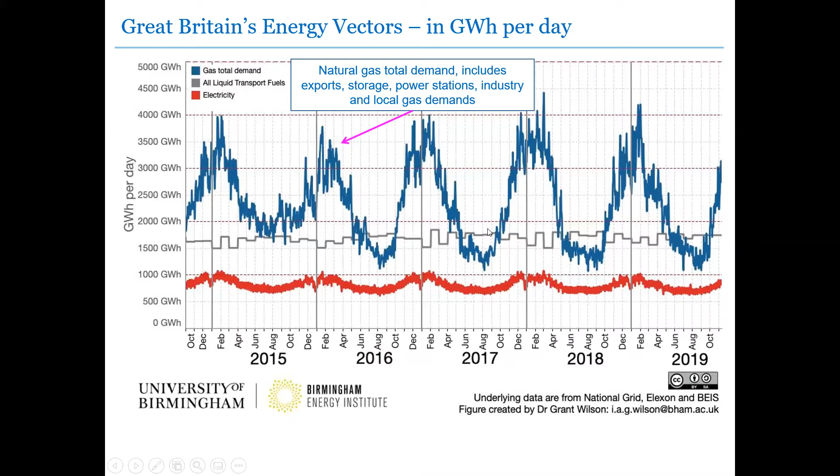So air quality is a driver in many cities in the world, and it's another factor we need to think about in terms of the motivation for looking at some of these cleaner, non-combustion based technologies, because a lot of the NOx emissions come from the combustion process.

I am going to talk a fair amount about hydrogen. And when we talk about electrochemical technologies, we're going to talk about making hydrogen, and we're going to talk about fuel cells for converting hydrogen. And the concept of hydrogen and its role in the energy transition is actually extremely topical at the moment.

Hydrogen has had previous waves of enthusiasm back to the 60s when people first sort of turned to the concept of hydrogen, through to the 90s and 2000s when there was a lot of surge of interest in hydrogen cars in particular. But I think today we have formed a nuanced and balanced view of hydrogen, which is that we look at decarbonising the whole of the economy.

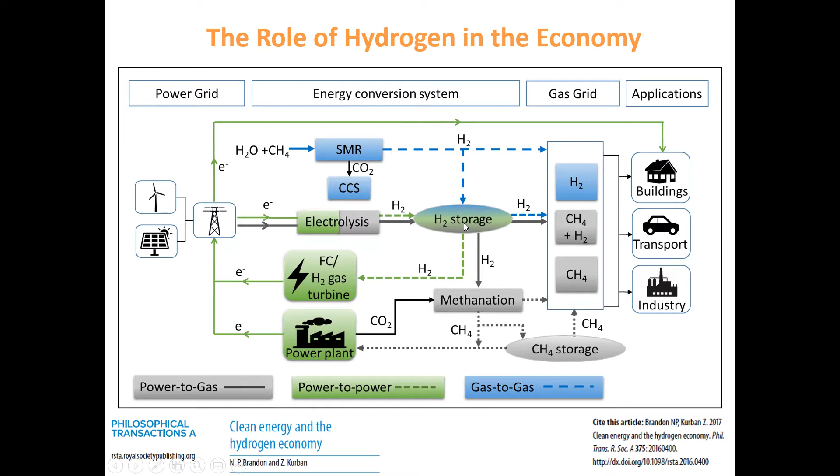So it's the interplay of electrons and molecules that is, I think, the key to achieving the lowest overall cost of decarbonisation going forward. And there's a big debate about the relative balance of those things, but I think it's very clear to me that you need both if we're going to cost effectively decarbonise.

So let me start by talking about hydrogen from electrolysis, and electrolysers are, of course, an electrochemical technology, the subject of today's discussion.

And when we look at green hydrogen from electrolysis, there are effectively three solutions that we have available to us, two of which are commercially mature today, and one of which is not yet commercially mature to the same scale, but is a subject, I think, of interest. And indeed, as it was mentioned in the introduction, this is some work we're going to be doing through the bp-ICAM program for the next 12 months, and I'll talk a little bit about that.

For anyone who follows this, you'll have seen a surge of interest and national commitments to green hydrogen from many countries around the world, including in Europe, but also in China and Australia, and even the UK coming forward with some statements very shortly around its ambitions around hydrogen. So when people talk about green hydrogen, they're really talking about taking electricity and directly splitting water to make hydrogen and oxygen. And it's the hydrogen that we particularly want.

We have today available electrolysers. These have been available for over 100 years. They're commercially mature. You can buy a 100 megawatt electrolyser and use that. It's a relatively low temperature technology, and it's the lowest cost route to green hydrogen today. We also need to remember that today green hydrogen is the most expensive form of hydrogen. So we'll look in a moment about where costs may be going. In terms of green hydrogen, alkaline is the cheapest available option today, reflecting the maturity of the technology.

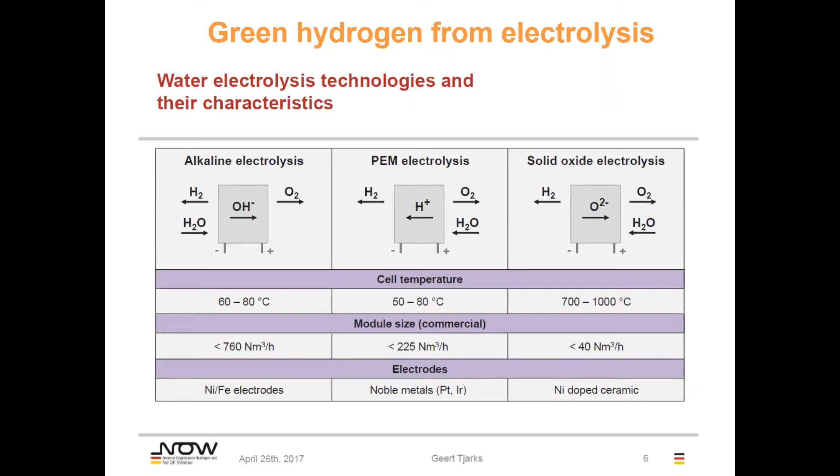So where are the costs today? For anyone interested in looking at this space, I commend this report from IRENA on green hydrogen cost reduction. It came out late last year. It's a good introductory overview of where these technologies sit today. This is their data. I've had nothing to do with the report, but it gives you some estimates of hydrogen production costs in US dollars per kilogram of hydrogen, being around $5 US today, but there's a range. And it makes some projections about where costs may get to, and they're projecting out to perhaps $1 per kilogram of hydrogen into the future if everything aligns.

If we look at the cost of green hydrogen today, 60 to 80% of the cost of that hydrogen is the cost of the electricity that's going into the electrolyzer. So future costs of green hydrogen are very sensitive to the renewable energy price. And this cost down curve here makes some estimates of the relative importance, for example, of reducing electrolyzer cost. This big drop down here is based off the decrease in renewable electricity price.

Something around electrolyzer efficiency, which of course is also very important because it impacts the amount of electricity you need, something around capacity factor, lifetime, and risk, which is related to the weighted average cost of capital. So if all of these things align, the authors of this report are projecting that we can see $1 per kilogram of hydrogen. Of course, whether we'll get there remains to be seen, but it shows the potential and is certainly getting a lot of people excited about the opportunity.

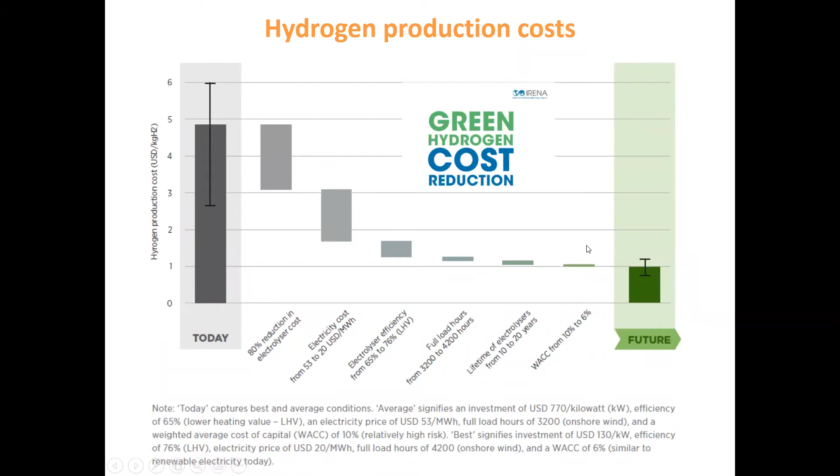As I say, my particular interest and the interest of some other colleagues is in high temperature electrolysis. And this is a couple of graphs to try and explain why we're interested in high temperature electrolysis. This is about energy consumption, kilowatt hours per cubic meter of hydrogen, for a liquid phase process like the low temperature electrolyzers, or a high temperature process like the solid oxide electrolyzers. This change in energy here reflects the heat of vaporization of water. So in this phase, we're dealing entirely with steam. We're not having to go from a liquid to gas transition, and that saves us some energy.

But you can also see that this is the Gibbs energy for splitting water. So this is the amount of energy we need to put into an electrochemical reactor as the theoretical minimum to split water. This is the enthalpy of that reaction. And while the enthalpy stays relatively independent of temperature, the Gibbs energy comes down. So that means we need to put less electrical work in to split water to make hydrogen as the temperature goes up. Of course, we still need to put the same amount of total energy in, and so we can balance that decreased electrical energy demand by putting in heat.

So it allows us to put in both heat and power to produce hydrogen. And so if we can co-locate our electrolyzer with sources of heat, for example, alongside other industrial processes, it provides us with much lower electrical energy demand. And of course, the electrical energy is normally the expensive bit of the overall process.

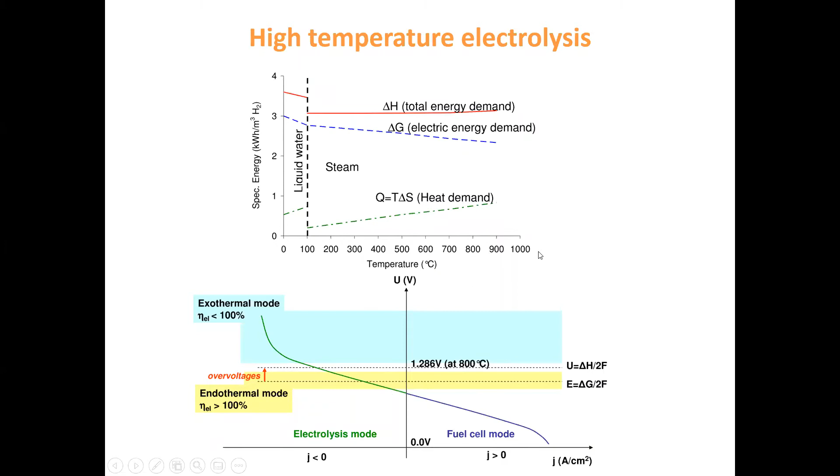So this is, just very briefly, the approach we've been taking within my own group, and we're very interested in the electrodes that are made and how you design electrodes that are both stable in the operating conditions and sufficiently active. And this is the sort of approach we're going to be taking forward in part in our new bp-ICAM project. We've been using electrospinning to make some quite interesting fiber-based structures, and then integrating those with our particular material here, which is a gadolinium cerium oxide.

This is a material that's catalytically active for the reactions we're interested in. So now we're talking about the reduction of steam. And then we produce these quite interesting microstructures which combine these electrospun materials with this doped cerium oxide. So this is the approach we're planning to take in the project, but we're going to not use nickel.

We're going to use some titanate materials that we've been exploring in a PhD project and take that forward. If anyone's interested in looking at this sort of work, we have a paper on this for solid oxide fuel cell electrodes. And this is the result of some of our solid oxide fuel cell developments. And this so-called fiber matrix structure, at least in this study, gave us much better performance than some of the other sorts of composite electrode structures we were considering.

And Dr. Huang, who did his PhD work, he will be the postdoc working on this project within bp-ICAM. So hopefully at some point he can report some of that work to you all. And this is the sort of microstructure we get. We're also very interested in the group in using these 3D imaging and visualization tools to try and understand microstructure and how microstructure relates to performance. And we'll be doing some of that work too in this project.

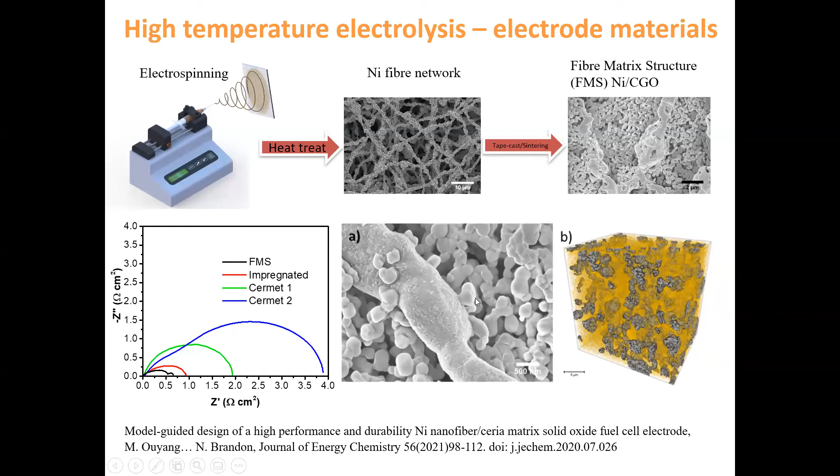We put in hydrogen, normally high purity hydrogen. That hydrogen is oxidized, releases electrons, forms protons. They're carried across this membrane, which has to be a proton-conducting membrane. It's a polymer-based perfluorinated sulfonic acid membrane. The protons combine with oxygen from air and the electrons to produce water, and the electrons are carried around an external circuit when it's connected across a load. That produces a flow of current, and we get a voltage generated based on the thermodynamics of the reaction. So typically about 1 volt or so when it's operating, a little bit less at higher power, of course, because of internal losses.

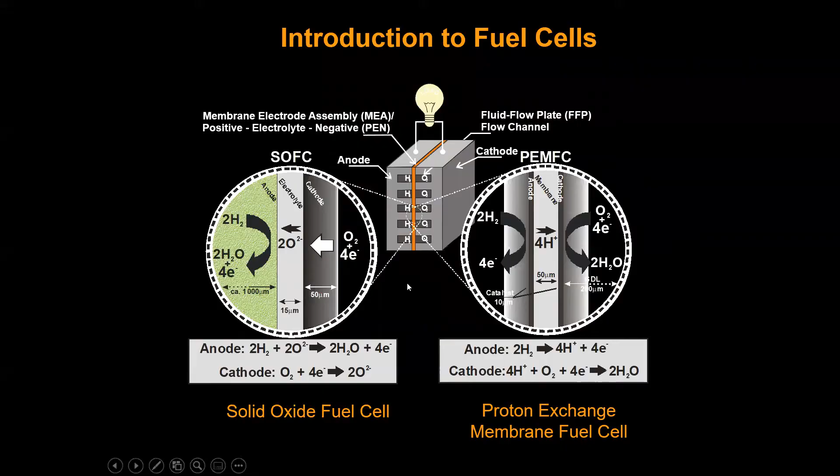But after that, you need to drive up to Sheffield, I think, to find the next one, though I believe Birmingham are putting in a hydrogen refueler at the moment. Or you can head west, and there's some in Wales, and there's some in Sheffield, and there's certainly some in Scotland as well. So this is where the landscape is for hydrogen fuel cell cars today.

The Toyota and Hyundai would be, I think, clearly leading in terms of having products on the market. The new Toyota Mirai is coming out this year, about £50,000, so less money with a longer range. But also the Hyundai Nexo is available, also quite an expensive car today.

Hydrogen refueling is appearing, and we might discuss in chat about the relative merits of battery electric versus fuel cell electric. But the rule of thumb, I say, is that as you need more fuel on the vehicle, as you want to drive it further, then the merits of a hydrogen fuel cell approach start to become more clear.

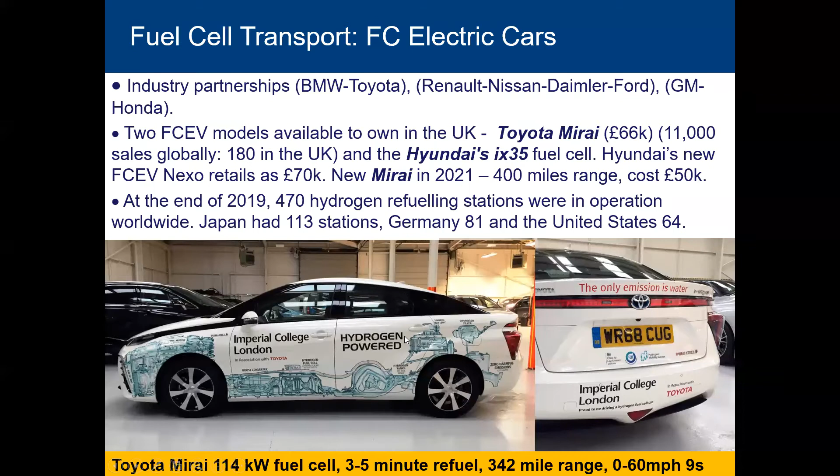One area where I think there is more clarity around hydrogen fuel cell electric vehicles is in the larger vehicle market. Fuel cell electric, I think, are a really interesting application area. There's increasing interest, particularly in Asia, in hydrogen fuel cell electric to replace diesel buses. The fuel cell subsystems are produced by a UK company called Arcola Energy. There's also Wrightbus in Northern Ireland working on hydrogen fuel cell electric buses.

If you're London-based, you can go for a ride on the RV1, which runs through Covent Garden, and they're refueled out at the Olympic Park to the east of London. And they've been carrying passengers for a number of years now on standard routes. But you can see a lot of interest in public good, high air quality, low emission hydrogen fuel cell buses around the world.

I'd say a newer, but I think really interesting area for hydrogen fuel cell electric is in the truck market. As we seek to go to complete net zero economies, things like long distance trucking or heavy duty vehicles really become hard to decarbonize using batteries alone. It doesn't mean it can't be done, but it's not such an obvious place to use a battery.

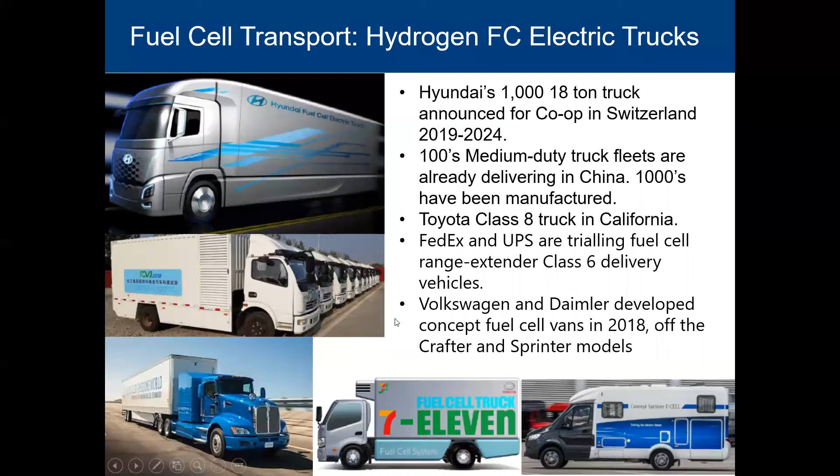Whereas it becomes a much more obvious place to think about a hydrogen fuel cell electric vehicle, in which you're carrying the hydrogen on the vehicle and turning it into DC power to drive all of the electric subsystems and the motors and so on. And you can see a number of programs, in fact, growing numbers of programs, including dedicated heavy-duty fuel cell products starting to be manufactured for this sort of application space.

Another one that's emerged that some years ago I certainly hadn't foreseen is hydrogen fuel cell electric trains. So this is electrifying lines where it's currently too expensive to consider doing overhead cables or electrifying the lines themselves, but still wanting to replace the diesel train that's on that line at the moment. And we're starting to see these now in Germany, taking passengers and performing very well.

We have a prototype unit on trial in the UK at the moment that the BBC covered just a couple of weeks ago that you might have seen. So again, this is interesting. You go from point of use. It simplifies the hydrogen refueling infrastructure because you don't need such a widely distributed infrastructure. And it's a really interesting technology to replace diesel on lines that can't carry those large capital investments of electrification.

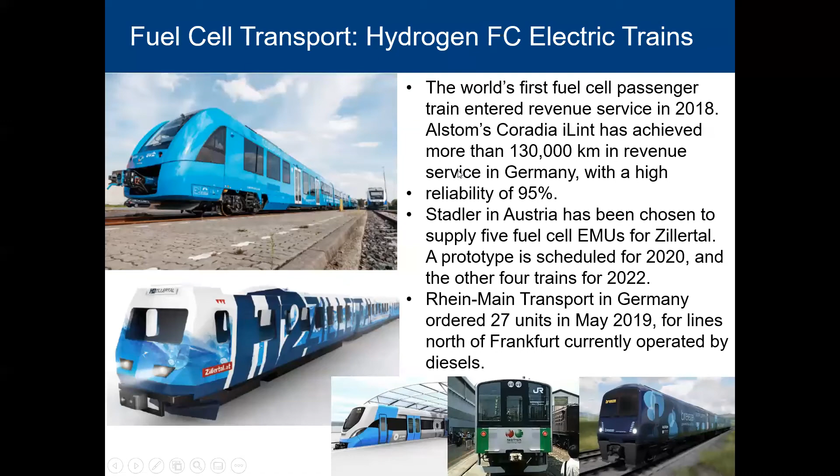In terms of innovation, this part of today's talk is about innovation and what new technologies are emerging. This is something in the fuel cell space I'd like to highlight. It's not my work at all. It comes from my colleagues, Anthony Kucernak at Imperial College and Dan Brett at University College. It's called Bramble Energy, and it takes a completely different approach to thinking about how you make fuel cells.

And in fact, they use printed circuit board technology and actually use that to produce their PEM fuel cell. The advantage of that is that you can manufacture low-cost technology using existing PCB factories. And this is their statement, that a single factory can make 5 gigawatts of fuel cell modules per year. And of course, there are many thousands of these.

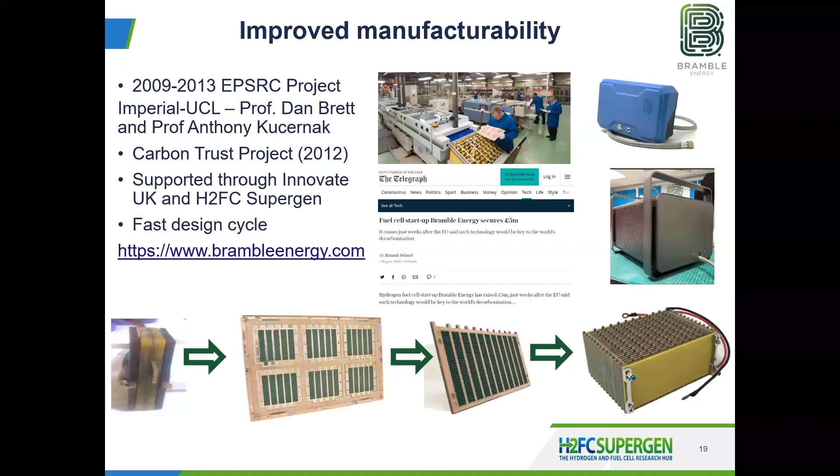And one of the challenges the sector has is how do you get to gigascale in terms of manufacturing? And this is a very interesting approach, so I'll just bring it to your attention. It came out of a Research Council funded project, and through our hydrogen and fuel cell Supergen, and also Innovate and the Carbon Trust have been taking this work forward. And here are some photographs of the technology that my colleague Anthony Kucernak has kindly provided. And indeed, they raised about £5 million last summer to be able to scale this up further.

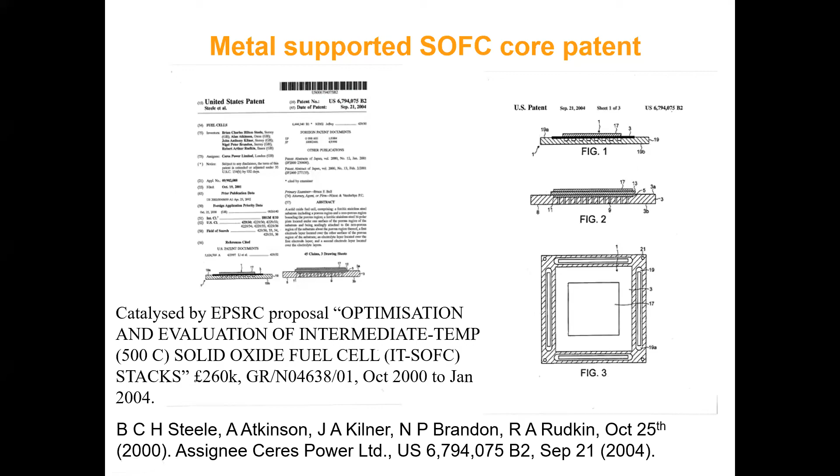Now, we've been working in this area for a long time at Imperial College. In fact, well over 20 years ago now, we had an EPSRC project, and off the back of that EPSRC project, we filed a patent. This is the front page of the patent, which was for a metal-supported solid oxide fuel cell that ran at much lower temperatures than conventional solid oxide fuel cells. In other words, they ran at somewhere between 500 and 600 degrees centigrade. This has proven to be a really interesting journey over the last 20 years. And today, this technology was taken out into a company called Ceres Power, if anyone wants to go and look at it. This is the current state of the technology, taken from a Ceres Power image.

And this is a metal-supported solid oxide fuel cell in which we have a ferritic stainless steel foil here, coated with the ceramic layers. So if you remember the cartoon, there's an anode, an electrolyte, and a cathode. This doesn't show us the cathode, which is the air electrode, which would look like a layer of black paint over the top. The shiny surface here is the electrolyte, that's the oxygen ion conductor. In this case, it's a gadolinium-doped cerium oxide. And under that is the anode, which is this porous composite of nickel and CGO that you saw in the picture about the electrospun electrodes, though these are not electrospun.

These cells are interlayered with interconnect plates that join one cell to the next. And this is a photograph of an assembled stack that would be a kilowatt or so in power at that size. If anyone wants to watch the video, it's featured on Fully Charged, an internet program that's quite good fun to watch. And this is a picture of the Horsham facility, which is not a manufacturing facility, but a pilot facility for cell making.

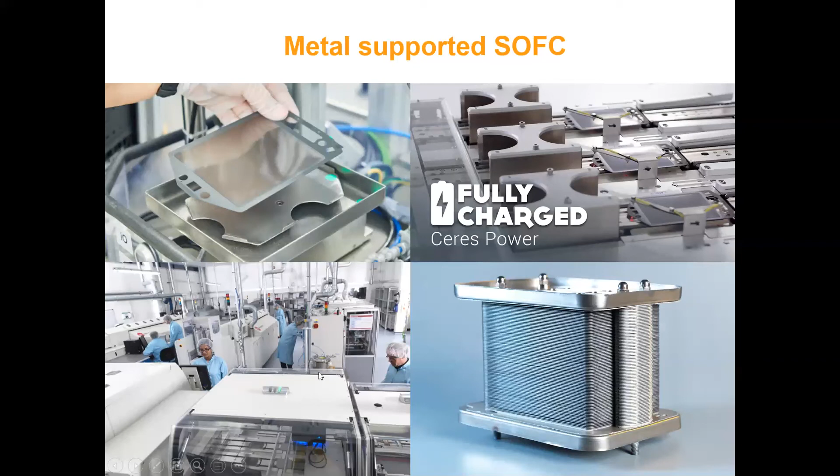A factory is being built at the moment. So this company has been very interesting. It's been a 20-year journey, and they have investors now with Bosch and Weichai. Weichai are a very large engine manufacturer in China, putting these fuel cells into buses in China.

Bosch are building a factory in Germany and have the intent to put Ceres fuel cells inside of their product range. A deal's just been done with Doosan, for example, for marine applications. And you can buy these in a 4.2 kilowatt CHP unit in Japan from Miura, who are one of the largest boiler manufacturers in Japan. So it's been a 20-year journey to get to this point, but a really interesting one.

So I've got just a few minutes left, and I want to talk now about energy storage. So one of the things I said at the start was the challenges of putting more and more renewables into the system is how do you balance supply and demand? And I'm grateful to my colleague Goran Strbac, from whom I've borrowed this slide from one of his presentations. He is a power systems engineer, and he looks at the stability, flexibility and economics of electrical systems and power systems.

And he makes this point that as we put more and more wind, for example, into the UK energy system, and we need to balance supply and demand, you either have to curtail that wind more and more. This is the percentage as the wind penetration goes up in terms of the amount of installed wind turbines, and or you have to invest in infrastructure to balance that supply and demand. And you have to be able to manage these much larger peaks by putting in infrastructure, which you utilize less of the time, because the amount of energy that flows is the same, but the peak powers are much higher. And this means your asset utilization goes down, and that means the cost of that infrastructure becomes much higher.

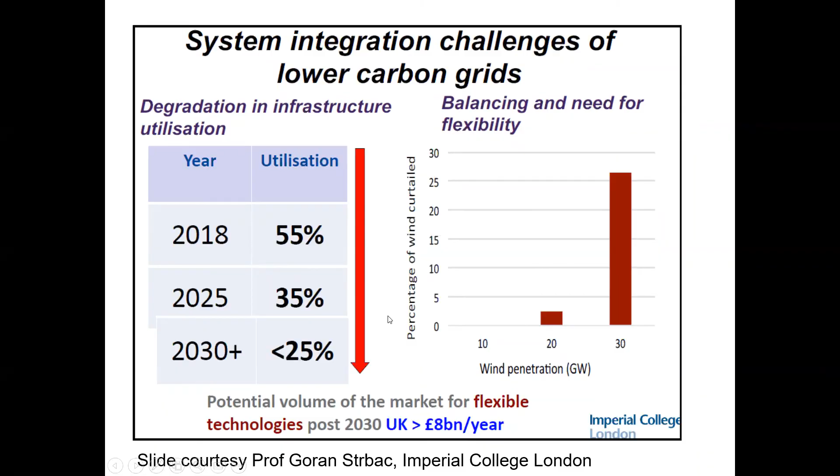And indeed, Goran estimates that post 2030, technologies that support the flexible balancing of supply and demand are probably worth in excess of £8 billion a year. And that's the sort of ticket price; you've then got to think about how you manage that. So we're very interested in my group in parts of this market, and particularly in the flow battery application. I'll tell you what a flow battery is in a moment.

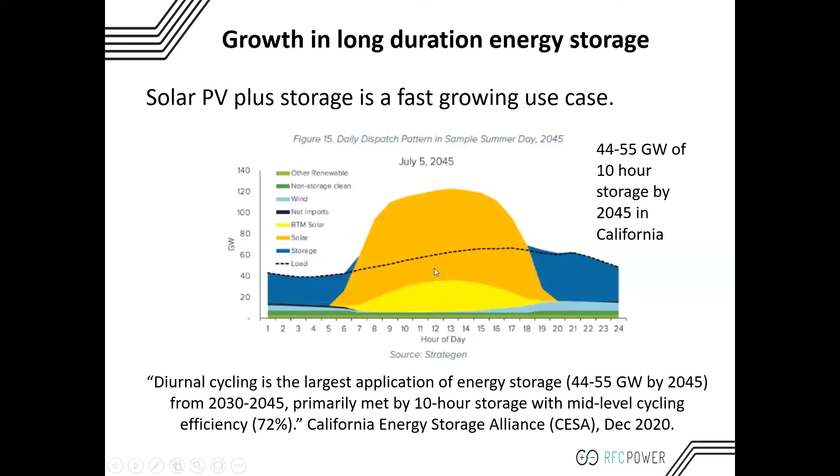But this comes from some data from California. It's a recent report into the impact in California of increasing PV penetration. And in California, for example, this suggests that by 2045, they're going to need something like another 44 to 55 gigawatts of 10-hour storage. So that's 440 to 550 gigawatt hours of storage in the form of 10-hour storage. And that's to balance the diurnal supply and demand coming from solar PV, just in California alone.

At the moment, the market for grid-scale storage is very much more in the 1 to 2 hour market, and this is very well served with lithium-ion batteries, and I'm not planning to talk about that any further. We're very interested in flow batteries, which are very well suited to these sorts of longer-term energy storage applications, such as 10 hours. We patented an energy storage application based on this, using a liquid gas hybrid system. There's a little cartoon of it here, and I'll show you a picture in a moment which looks at the chemistry in a little bit more detail. And it's based on the use of a liquid redox couple, and in this case, a hydrogen couple.

So in a flow battery, unlike a lithium-ion battery where you're storing the energy inside your anode or cathode material in an intercalation type material, you have a cell here, much like an electrolyser, in which you create an oxidized form of that redox couple, and you create a reduced form of that redox couple. You store them in tanks, and then when you want the energy, you flow them back in together. And as a fuel cell, this then generates that electricity back.

So again, along with Anthony Kucernak, who I've mentioned before in the context of Bramble Energy, Anthony and I and two of our postdoctoral team have a number of patents and created a company 2 years ago based on some novel chemistry, which we think gives us much bigger cost advantages compared to conventional flow batteries.

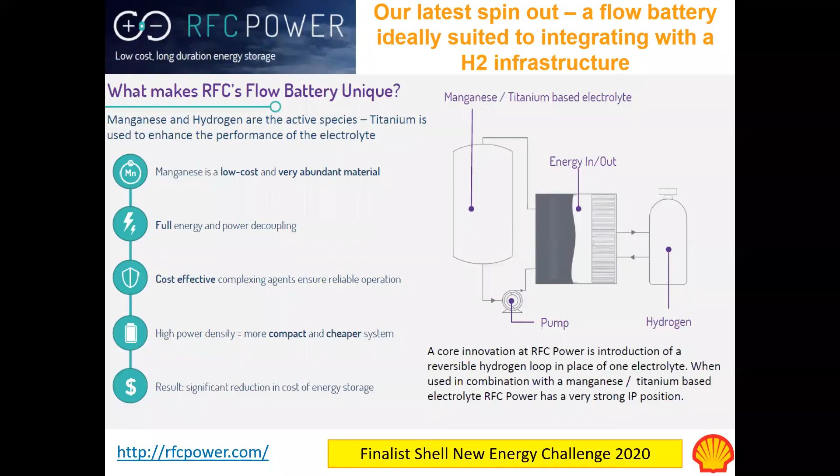This is in brief the chemistry. It uses a manganese couple on the cathode side, a hydrogen in a closed loop on the anode side. And this gives us quite a high cell voltage in the context of flow batteries and a good power density. This is some data from a paper that we published a year or so ago showing extremely high power densities

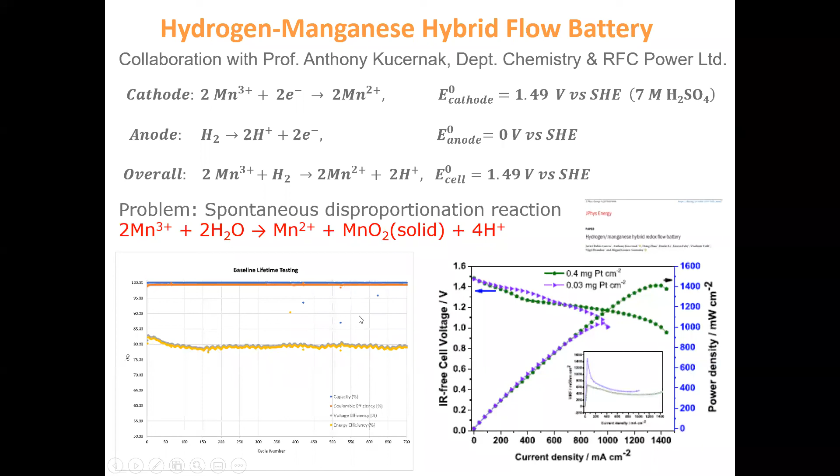from this technology. And this is some recent data from the spin-out company itself, RFC Power, looking at 700 cycles and completely flat performance across 700 full discharge. This is 100% depth of discharge cycles. So we think that's interesting. And the company has 6 employees now and has just completed a seed round, which will allow us to take the work forward.

And finally, well, not quite finally, but on the storage side, finally, just to point out that one of the other challenges with offshore wind is managing a period in the winter when the wind doesn't blow. We often get a period in Northern Europe when the wind is curtailed or doesn't blow in the winter, when, of course, our energy demand is at its maximum. Again, I'm grateful to my colleague Goran Strbac for this slide. And it's an estimate of how much energy reserve you need in a low wind period. In this case, for thinking about hydrogen and storing hydrogen in underground tanks.

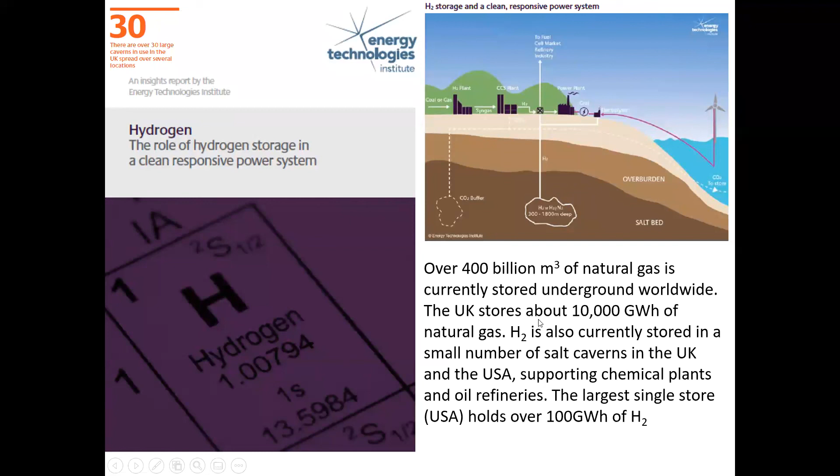And if we have a couple of weeks with low wind, we probably need 20 terawatt hours of energy storage. And that's about 2,000 pumped hydro facilities. So it's a very large amount of energy. And you can think alternatively about storing that energy as hydrogen, creating it, for example, using offshore wind, and storing it and then using it when the wind isn't blowing through underground caverns. Might sound a bit science fiction, but it's already done in the UK and in the USA and elsewhere for completely different reasons. So we know technologically it's a valid approach.

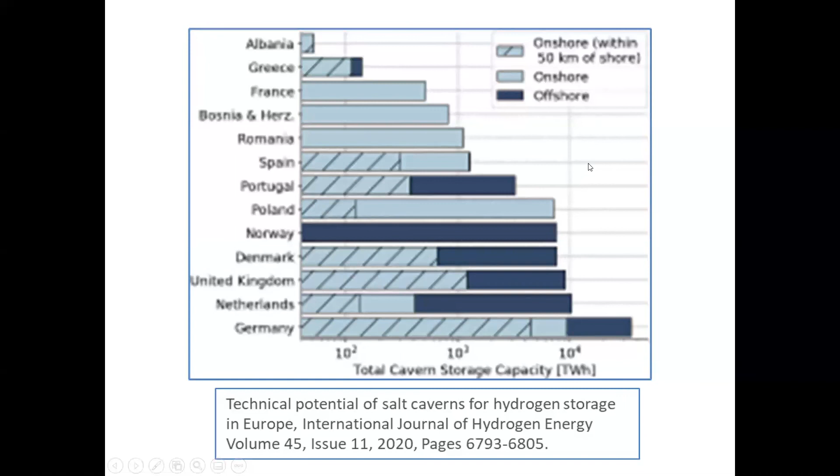And indeed, there was a recent nice article on this, looking at the potential of salt caverns for hydrogen storage in Europe. And if we think we need 20 terawatt hours, that's about here on this plot. And this is looking at the capacity across a whole range of different European countries. And we can see that all of these countries have the capacity to balance that seasonal energy demand with hydrogen underground storage if they wished.

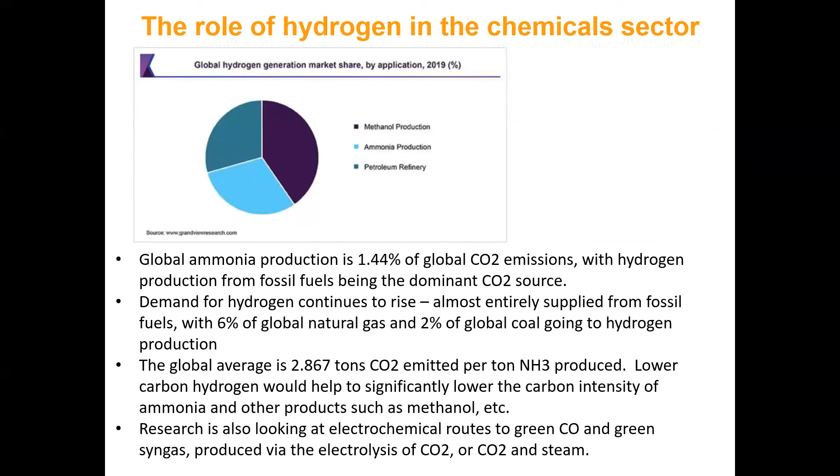And finally, and it will be finally because I'm out of time, we mustn't forget that we make hydrogen today. We make hydrogen today for the chemical sector. We make it as a feedstock. 96% of that hydrogen is made from fossil fuels today. It's made from natural gas and coal. 6% of the world's natural gas is used to make hydrogen, and its use goes into things like ammonia and petrochemicals. If we look at where projects are today about green hydrogen, there are really interesting projects around displacing brown hydrogen. That's hydrogen from fossil, hydrogen from coal and gas, with green hydrogen.

I just highlight three. This project with Shell in Rotterdam, which has been announced to make 50 to 60,000 kilograms of green hydrogen per day. The largest green hydrogen project in Saudi Arabia to make green hydrogen and green ammonia and export that into international markets. That uses an alkaline electrolyzer. And then BP's own project, which was announced late last year with Ørsted, using offshore wind and coupling that with BP's Lingen refinery to help decarbonize that refinery business.

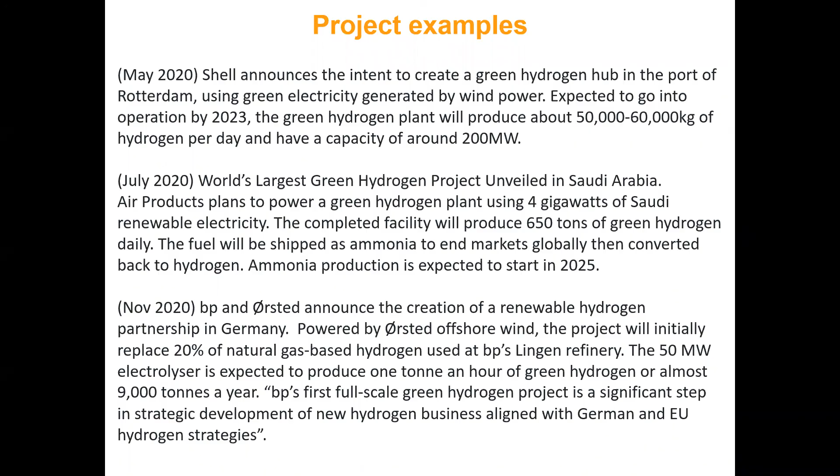So I'll stop there. I hope what I've shown you is that electrochemical technologies are flexible. They offer high efficiency. In a world in which we're looking to decarbonize, I think they're going to be increasingly important. Materials matter, as does device manufacturing. And so I think that's something for all of us working in this space to recognize. I think we have a great science base in this field, as well as a very interesting industry base. And we've just started a project with bp-ICAM, which we look forward to sharing subsequently.